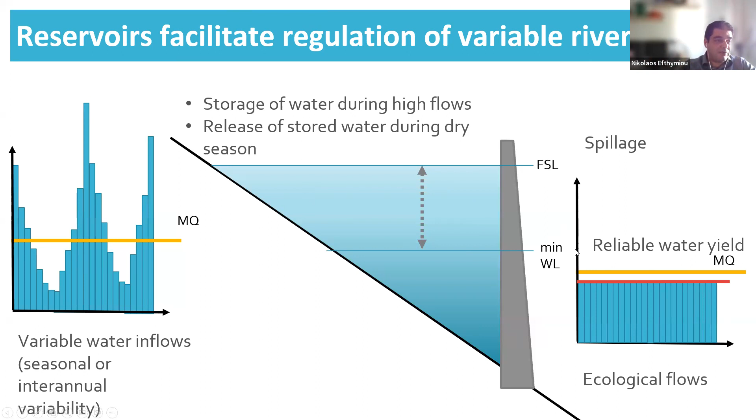So let's see some historic features. We all know that most of the reservoirs worldwide were constructed in the 60s, 70s, and 80s. After this period, we have a significant drop in the number of new reservoirs commissioned. And when we see the cumulative storage that is available globally, we have this S-curve, and we can easily calculate the average age of the global reservoir fleet, which we can assess at around 50 to 55 years old.

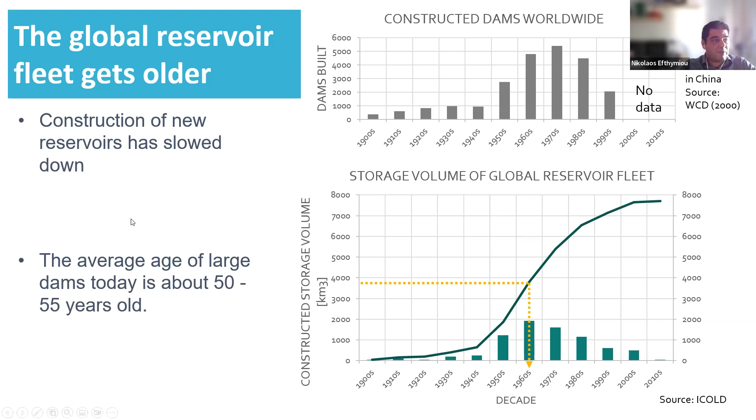You can understand that these reservoirs have accumulated sediment over the previous years of their operation. This sediment has displaced the available storage volume, the water that can be used for beneficial uses, and as a result, it affects the performance of the reservoirs. If we want to see the big picture, there are estimates that global sedimentation ranges between 0.5% and 1% of the available reservoir storage every year.

Here the black line shows the curve that we saw earlier. This is the cumulative storage capacity that has been constructed from the beginning of the previous century up to today. This is just indicative, showing that we have a slower addition of new storage. The gray area shows the constructed capacity, and the yellow area shows the sedimentation based on an assumption of a mean annual storage loss rate of 1%.

That means that between the black line and the yellow area, we have the available remaining capacity as it develops over time. We see that the maximum value was approximately here in the 90s. And since then, you can see that the width of the gray area is reducing. That means that the net storage, meaning the constructed capacity minus the storage loss due to sedimentation, is continuously decreasing.

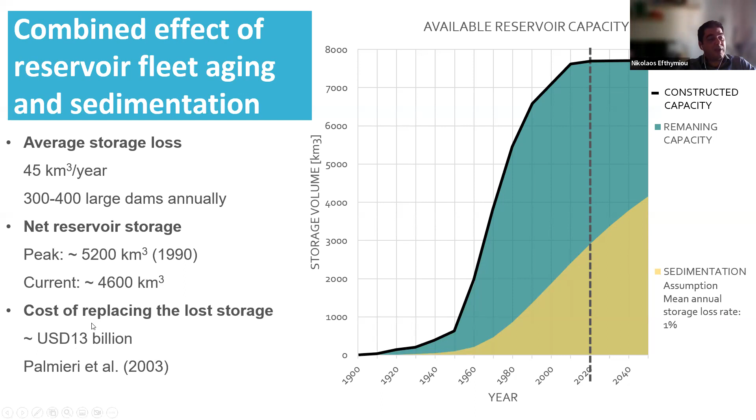Now, if we want to go to the impacts of sedimentation, first of all, we need to understand that there are different aspects and functions related with reservoirs that are affected by sedimentation. First, let's discuss the environmental. And the most important is that we have an interruption of the sediment transport continuity in the river where the dam is constructed and the river connectivity.

So by creating the reservoir, we reduce the flow velocity of the river within the reservoir. As a result, sediment drops out from the water column and remains in the reservoir. Actually, this is the definition of sedimentation. But this means that we create a sediment deficit downstream of the reservoir. Now the river will have an increased transport capacity, but it will be under supply limited conditions. So this is the so-called sediment hungry effect. That means the river is able to transport sediment, but doesn't have the sediment.

And in order to satisfy the sediment transport capacity, we have the phenomenon of downstream erosion. That means the sediment will be scoured and the sediment transport capacity of the river after a few kilometers will be reached. This can cause important environmental consequences which affect the river morphology, the fish habitat, and can reach down to the coastal zone, creating coastal erosion. We have observed cases in Japan as well as in Europe where the coastal zone is eroded with a rate of a few meters every year. You can understand that this causes, of course, huge consequences.

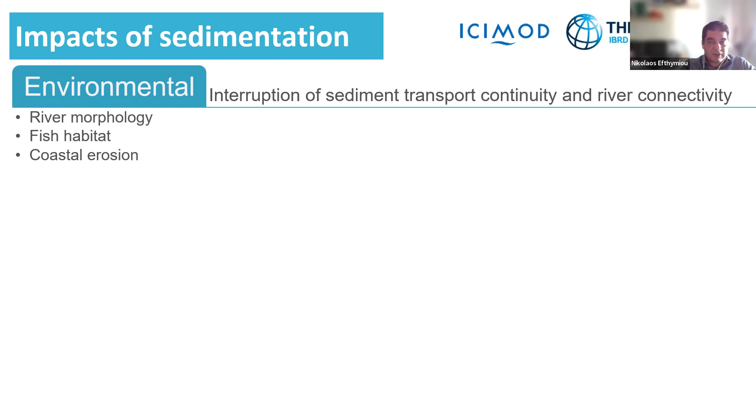Then, of course, we have a very important economic impact driven by sedimentation and the loss of the reservoir's active storage. And this is the reduction of the reliability for water supply and irrigation, as well as for storage hydropower production. We have the reduction of peaking or seasonal or long-term energy storage.

In mountainous areas like Nepal or the Andes in South America, or in Alpine countries where we have large quartz content in the sediment created by the glaciers, we have a significant risk related with the abrasion of generating equipment. As well, if the reservoir serves for flood protection purposes, we have a reduction of the flood surcharge volume, so that means reduction of the effect on flood retention.

And the important aspect that we should also consider is that, of course, the sediment deposits will remain at the upper reaches of the reservoir, causing the so-called deltaic sediment deposits, the sediment delta. And this might affect what will happen with the flood protection upstream of the reservoir. This is also one aspect that must be considered. It is a significant impact of sedimentation.

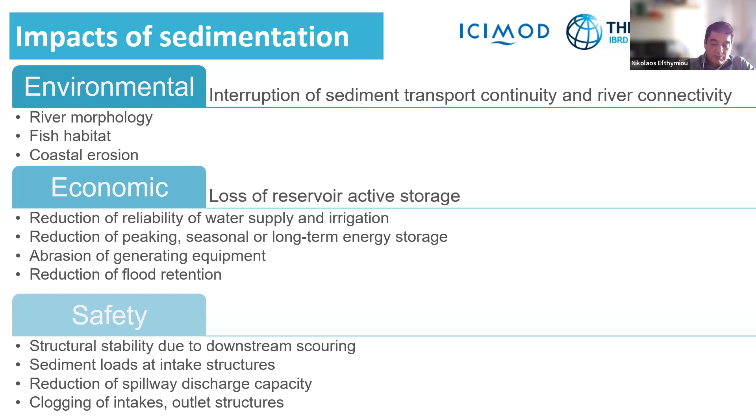Sedimentation might cause a reduction of the spillway discharge capacity, and a very frequent threat and risk is clogging of intakes and outlet structures. For instance, if the bottom outlet embodied in the dam structure is not operated regularly, then usually it is clogged. And this, of course, might affect dam safety, since the bottom outlet is a very important hydraulic structure from this aspect.

Now let's discuss a little bit. We all are experiencing different climate conditions than the ones we have been used to, the ones we were raised with. We see that we have more frequent floods and longer droughts. There is a consensus among climate scientists that climate change causes an increase of the hydrologic variability.

This is clearly expressed, for instance, in the fourth assessment report, in the synthesis report, where it is mentioned that we are to expect increased precipitation intensity, and that means flood events and variability. This phenomenon is projected to increase the risk of flooding and drought in many areas.

So that means we are expecting an increased hydrologic variability, which in the first slide we mentioned is another important parameter that affects the performance of reservoirs. Of course, we're also expecting changes in the availability of runoff. This can be expressed, for example, by the mean annual runoff.

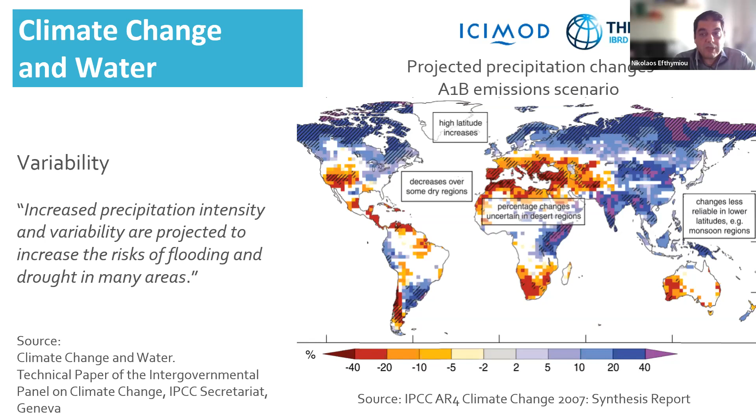And there, of course, one thing that we should acknowledge is that there is important uncertainty in the projections of the global circulation models. So this important uncertainty must be considered in any climate change risk assessment, since we have different opinions on how the mean annual runoff will develop in the future.

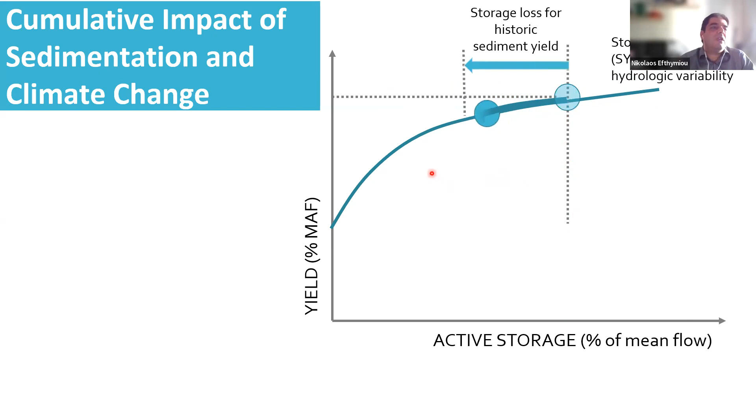And now, because of sedimentation, we know that active storage is reduced continuously. If we move now to a new reservoir condition because of sedimentation, we see that actually we have a reduction of the firm water yield that can be supplied by the reservoir. So this can be considered to be the impact of sedimentation.

On the other hand, we are talking about climate change and increased hydrologic variability. So we know that we can anticipate increased hydrologic variability, more floods and longer droughts in the future. So here the red line represents again the storage yield reliability, but for an increased coefficient of hydrologic variability. At the same time, we can make an assessment that climate change will create an increase of the sediment loads in the river.

For instance, in Himalayan countries, if we have a retreat of the glaciers, this will add additional sediment loads in the rivers. In Mediterranean countries like Greece, we are expecting drier conditions, which will increase the wildfire risk, which is a major parameter driving erosion in the catchment. So we can say that it is very likely that climate change will induce also an increase of the sediment loads.

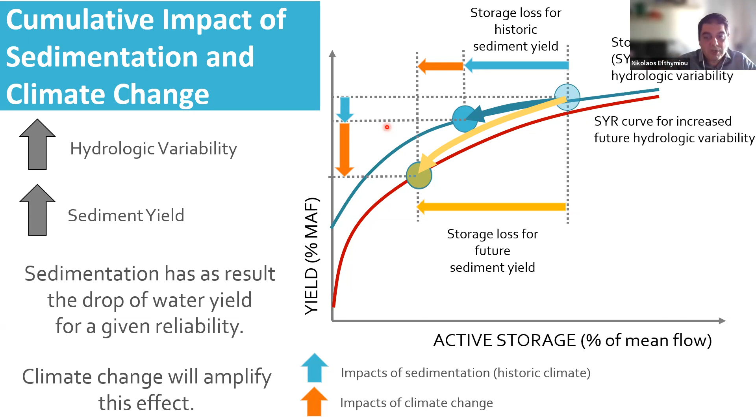Now, if we consider the combined effect of climate change, increased sediment loads, and sedimentation, we see that the impact is much more severe than it would be without the climate change parameter. So this is an important aspect that should be considered, that it's not only sedimentation, but also the future hydrologic conditions most likely will cause more significant impacts of sedimentation, exactly because we will have more intense floods, higher sediment loads, and also the demand will be increased.

So this was nicely formulated in 2003 during the Third World Water Forum in Kyoto, where it was highlighted that in our century we will need to focus on sediment management, and the idea will be to convert the available reservoirs which are non-sustainable. We will need to take action in order to convert them to sustainable facilities. And of course, this applies also to the planned reservoirs, in the greenfield projects.

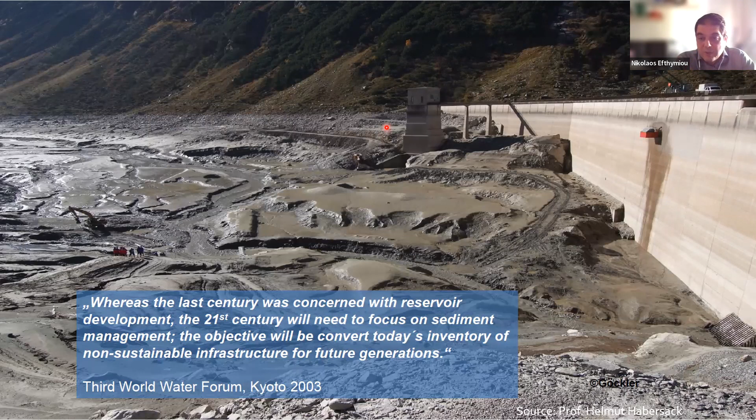We must learn from the mistakes we did in the past, and we must plan reservoirs that will be able to handle, to manage the incoming sediment in order to ensure that they can be managed sustainably. So now just a very brief overview of how this can be done. So we are talking about storage conservation or sediment management.

And here we see the unsustainable paradigm. So that means here we have the incoming sediment. Because of the change of the hydraulic conditions within the reservoir, we have sedimentation, and the sediment releases are much slower than the incoming sediment yield. So that means the storage of the reservoir will be practically eliminated in the future. Of course, it's difficult to predict now what is the lifetime of the reservoir, and this is what we will show how it can be done with RESCON.

But the key idea is that this is something that we should prevent, because we have the environmental impacts downstream. We lose the functionality of flow regulation over time due to sedimentation. And of course, there are the safety aspects that were mentioned. There are different strategies to sustain the reservoir storage. Just to take the main grouping classification that has been reported, methods that have been developed in the past for management of sedimentation include, first of all, a reduction of the sediment yield arriving in the reservoir.

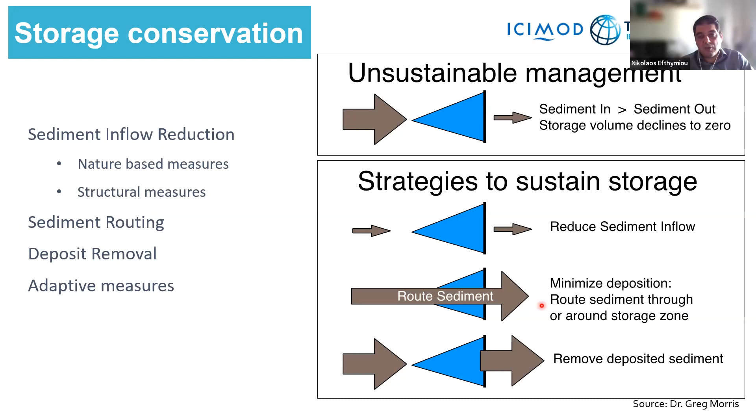And the other general method is to allow sedimentation in the reservoir and then remove the deposits downstream or in upland disposal areas. So there are different methods. This is a classical classification that has been presented by Greg Morris. Here we see the reduction of the sediment yield, which can be, for instance, performed by soil erosion control and revegetation, or by creating additional sediment retention upstream of our reservoir.

So we have also sediment routing techniques, for example, sediment bypass, where we try to divert part of the incoming sediment load around the reservoir, or sediment pass-through, for example, sluicing is a common strategy within this category, where we lower the water level in order to increase the velocities in the reservoir and to facilitate a lower sedimentation and to facilitate sediment passing through the reservoir.

And finally, we have different deposit removal techniques. For example, we have dredging or hydrosuction, or there is hydraulic scouring, for example, empty flushing that can be used for the removal of sediment deposit. An important strategy is the adaptation. So that means we accept that we'll have sedimentation in our reservoir, and we will need to adapt to this situation. For example, here we can have modification of intakes or hydroturbines, for instance, to prevent or to minimize or to mitigate the abrasion risks.

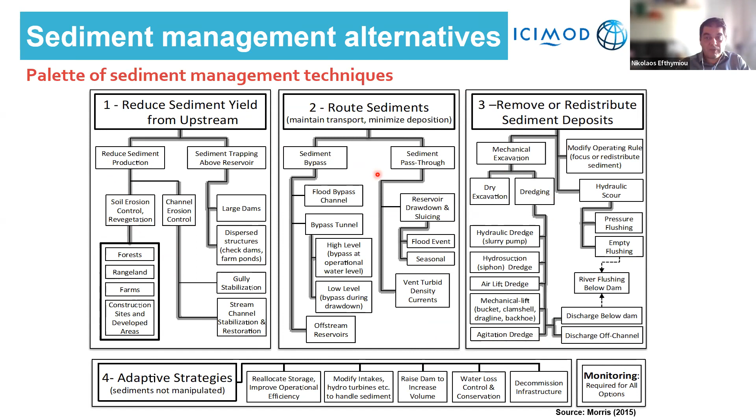An aspect is to raise the dam in order to increase the volume. But we must understand that these are not sustainable solutions. Of course, usually it is a combination of different methods that is applicable in a reservoir, and it's important to highlight that the selection of the optimum sediment management strategy is always highly project and site specific and needs tailoring to the prevailing conditions in each reservoir.

Just a few words on the global sediment management study, although this has been described by Pravin at the beginning of our workshop. So in the previous years, the recently established hydropower development facility of World Bank's ESMAP conducted a global study in sediment management, which was funded by the Austrian government. And the objectives of this study were to improve practitioners' understanding of sedimentation impacts and to support the planning, implementation, and operation of effective and sustainable sediment management both in storage reservoirs and run-of-river hydropower plants.

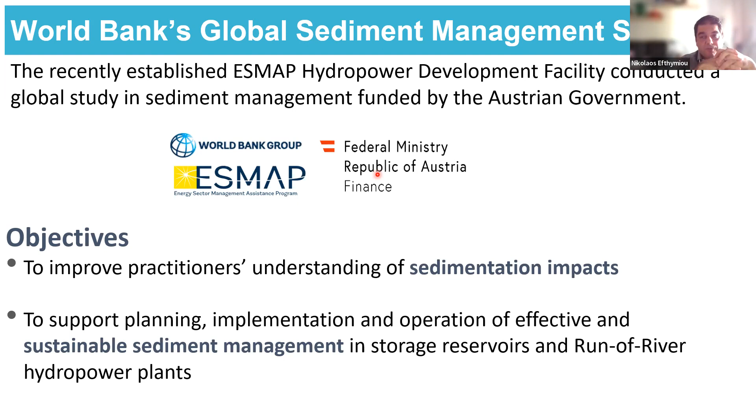So this program had 5 programmatic activities. One of these was the development of technical analysis tools to support the identification of sedimentation risks and screening of sediment management alternatives. And one knowledge product of this program was the development of the new version of the model RESCON 2, which actually is the topic of our webinar these days.

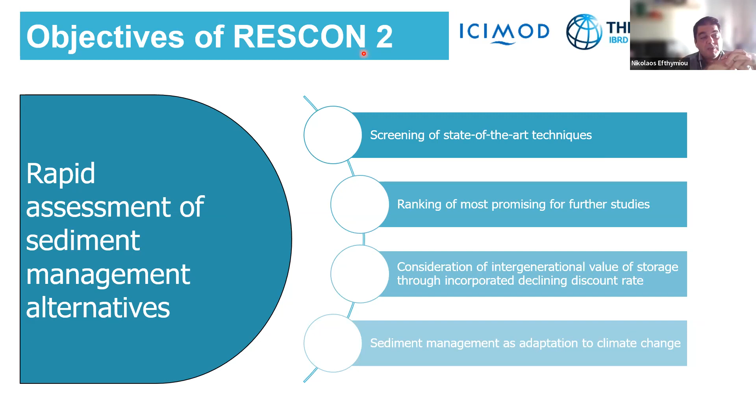So without any delay, I would like to go into the objectives of the RESCON 2 analysis, which are to provide a screening of the state-of-the-art sediment management alternatives. So there is a wide palette of sediment management techniques. To rank the most promising for further detailed studies. And a very important aspect is to consider the value of intergenerational equity that is created by storage conservation. And finally, to provide a preliminary assessment of climate change related risks in combination with sedimentation, and an assessment of sediment management alternatives as an adaptation to climate change.

So this work is based, of course, on previous works. So we have the manual of the first version of RESCON. So it is a publication, Extending the Life of Reservoirs, from World Bank Group, where George Annandale, Gregory Morris and Pravin Karki provided guidelines on sustainable sediment management, both for dams and run-of-river hydropower schemes.

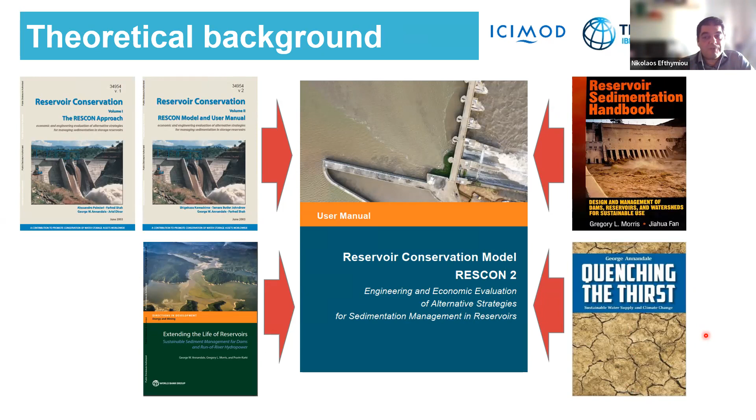We have the classical textbook on reservoir sedimentation by Gregory Morris and Jiahua Fan, and the book from George Annandale, Quenching the Thirst, where he presents the impacts of sedimentation on reliable freshwater supply, and he presents the importance of reservoir sustainability. So we are talking about resources.

An important aspect is that, as with every software and model, there are limitations that must be well known from the beginning. RESCON 2 is a computer program which is designed to be used in pre-feasibility studies when we have limited and readily available site-specific data. So that means that it is not a substitute for more detailed studies, which must be conducted with numerical and physical models during subsequent project development stages, during feasibility studies or detailed design.

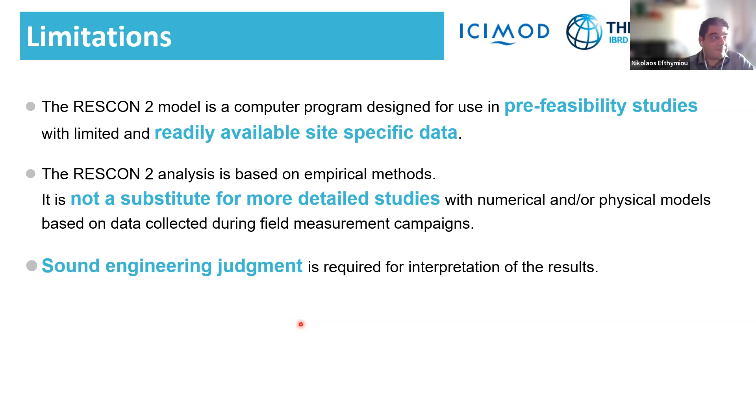So we mentioned briefly that there was a previous version of RESCON. Actually, the development of this model goes back to 2003, when the first version was published by the World Bank with contributions from Alessandro Palmieri, George Annandale, Farhed Shah, and other workers in the area of reservoir sedimentation. This was an Excel-based technical analysis tool, and was able to assess deposit removal techniques in a relatively simplistic manner.

In the meanwhile, until 2015, RESCON was extensively applied worldwide, and the need for storage preservation emerged more on the surface. As the global reservoir fleet got older, the importance of reservoir sedimentation management became even greater, and climate change emerged as a controlling parameter in the future.

So this prompted a revision and upgrade of RESCON, and in 2017 the beta version of RESCON 2 was published, with the main innovation that sediment routing techniques were also included in the assessment. So apart from dredging, flushing and hydrosuction or trucking, sluicing, bypass and density current venting could be assessed. Again, this was an Excel-based platform. We had a graphical user interface, but actually the computations were performed through a very long macro developed in Excel. This version was developed by the World Bank, which contracted Fichtner Consulting Engineers from Germany.

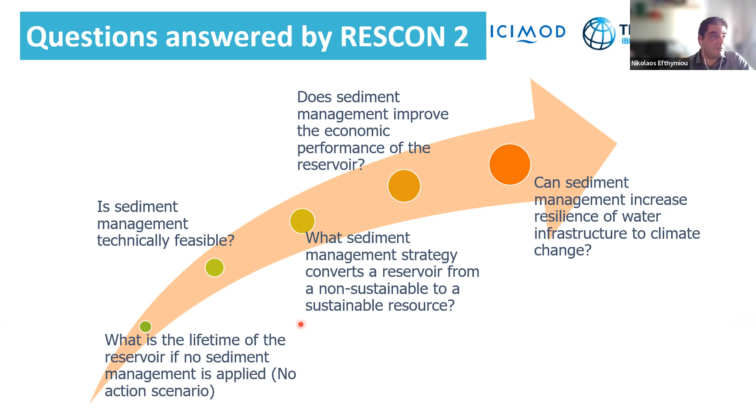So the capabilities of RESCON is that it is able to predict the time path, the development over time of sedimentation, as well as the spatial pattern. It performs a preliminary assessment of the development of the spatial pattern of reservoir sedimentation. That means how the deposits are allocated between active and inactive storage.

We know that inactive storage or dead storage is the storage that is below the minimum operating water level or the sill level of the lowest outlet of the reservoir. And active storage is the storage that can be used for regulation of incoming flows and that affects the firm water yield that can be supplied downstream.

Apart from this, we evaluate the state-of-the-art sediment management alternatives. We talked earlier about catchment management to reduce sediment yield arriving at the reservoir, sediment routing, deposit removal, as well as combined strategies, which involve different techniques applied simultaneously, concurrently, or sequentially.

It includes an economic appraisal whereby the firm water yield is assessed and valued, and it considers the virtues of intergenerational equity and sustainable development through discounting concepts that are used for the assessment of the net present value of the future benefits, which also give a value on the future benefits today. We will discuss this in the coming days.

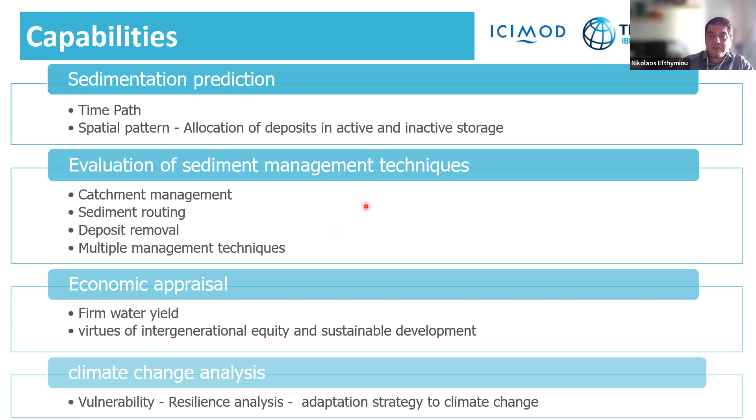And finally, as we mentioned, we have a climate change analysis where the vulnerability of the reservoir is assessed based on a climate stress test. We perform a resilience analysis where we evaluate the performance of the reservoir for different configurations, whereby configurations are defined by different sediment management alternatives and for different climate futures. And we have also an assessment of the adaptation to climate change: which sediment management alternative provides a robust adaptation to climate change.

After the first assessment, let's call it the physical performance of the reservoir, and based on the prevailing condition after sedimentation, we can calculate the water yield that can be supplied for a given reliability from the reservoir. This also depends on the prevailing hydrologic variability, the coefficient of hydrologic variability.

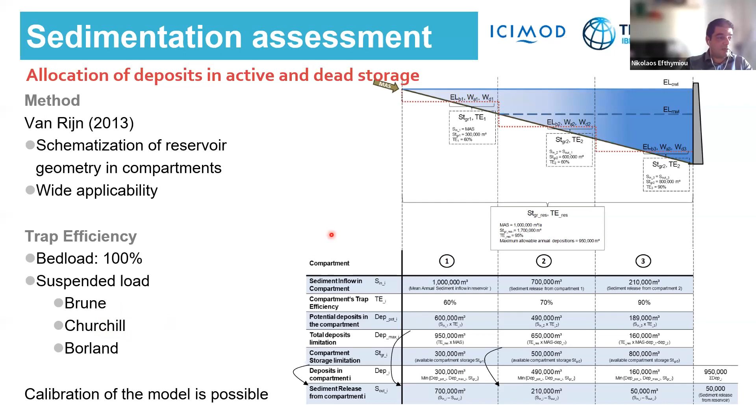It's important to point out that it is not possible to assess adaptive strategies except for decommissioning of infrastructure. We will see during the examples how this can be assessed. And of course, it's important to evaluate different combined strategies involving multiple techniques.

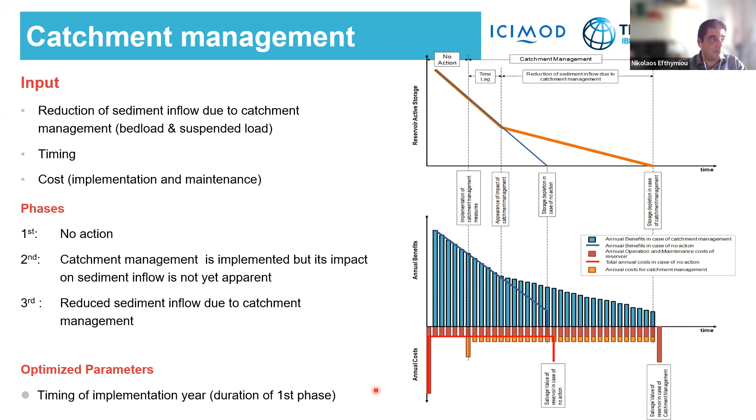Now we discussed the economic appraisal. So we said that we depend on the active storage availability. We explained how this is calculated with the trap efficiency and the assessment of the annual sedimentation. The water yield, which is now partitioned into different water uses. So it is possible to specify if we have a multi-purpose facility.

Hi, Dr. Nikos. Sorry for the interruption. Maybe after some section, you may consider having a short break, depending on participants' interest. You can decide accordingly after appropriate timing. Maybe a 5 minute break or so. Yeah. Give me a few minutes to complete the economic appraisal, and then yeah. Sure, that should be perfectly fine. Thank you. Excellent. Thank you so much.

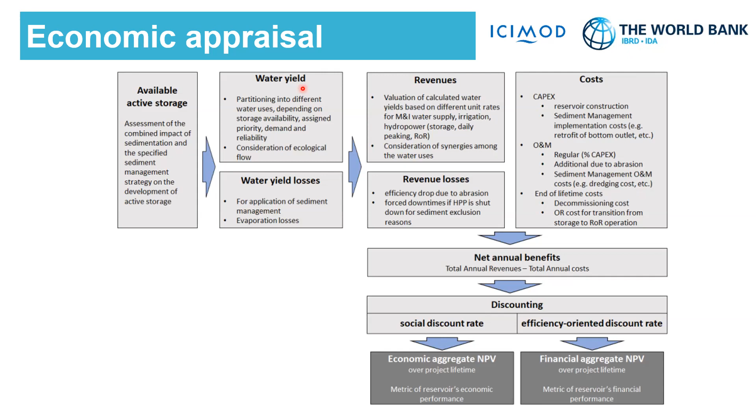So based on the available active storage, we calculate the water yield, where we can consider also the different water uses if we have a multi-purpose facility, as well as the ecological flow demands to be released downstream of the dam. We assess the water yield losses related with sediment management, as well as evaporation.

It's important to point out that sediment management is also associated with activities like reservoir emptying for flushing or water level drawdown for sluicing. As a result, this also has an impact on the water availability that affects the firm water yield that can be supplied downstream of the reservoir. So based on the calculated water yield, firm water yield and the respective water yield losses, we calculate the revenues and the revenue losses, the foregone revenues because of sediment management.

So here we have the related costs, where we have the reservoir construction, the capital expenditures, as well as capital expenditures for sediment management. For example, if we want to retrofit an existing reservoir and dam with a new outlet for sediment management, for example a new bottom outlet in order to perform flushing, usually this is very expensive. So this is an additional cost that should be considered in any sedimentation and sediment management analysis. We have the annual operation and maintenance costs, which are usually expressed as a % of the capital expenditures for the construction of the reservoir.

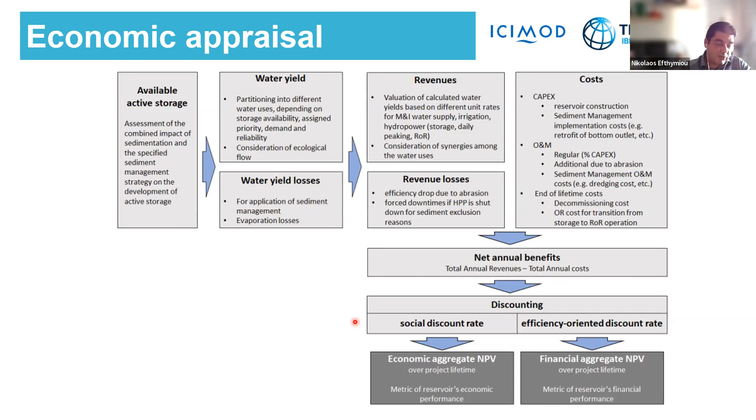So we have implemented discounting concepts that enable assessment of the value of intergenerational equity that is created through sediment management and the extension of reservoir lifetime.

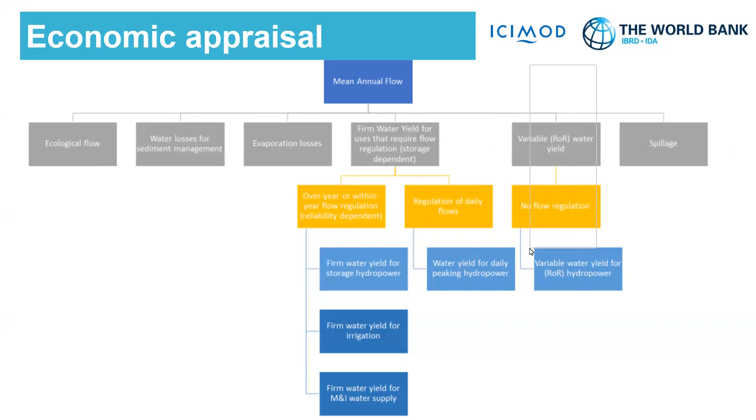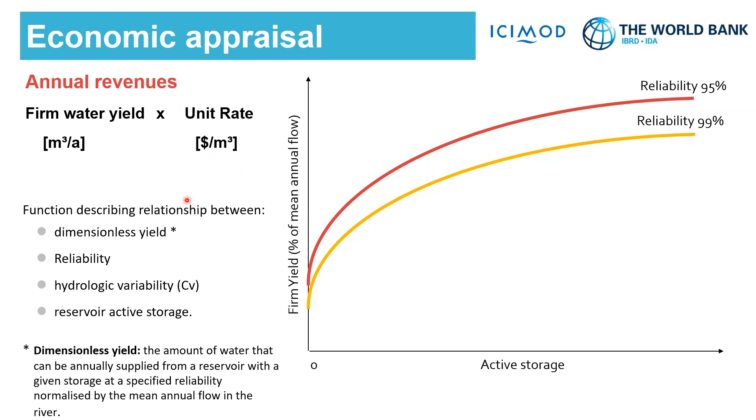So again, we show the curves that are used for the assessment. Here, this is just indicative. And of course, when we have the requirement for higher reliability of the water yield provided for beneficial services, then the curve goes lower than the respective functional relationship when we have lower reliability demand. And after calculating the firm water yield with empirical approaches, we multiply with a user-specified unit rate expressed in dollars per cubic meter. And this way we calculate the annual revenues.

Now then we discussed also the costs, where we have capital expenditures for construction of the reservoir and implementation of sediment management strategies. We have the regular annual operation and maintenance costs for sediment management. These annual operation and maintenance costs are also affected by the abrasion risk, which again depends on the condition of the reservoir, if it can act as a desander or not. And we have also the decommissioning costs or costs for transition from one hydropower operational mode, for example, storage facility, to run-of-river operation.

Then, depending on the discounting scheme, we have different development of the net present value. Here we see an example where we are applying flushing, and for this reason you see this wide band of annual net present benefits. So the lower side shows the years where we have implementation of flushing. So that means we have additional water releases for flushing. This water cannot be used for beneficial services. So that means we have lower revenues.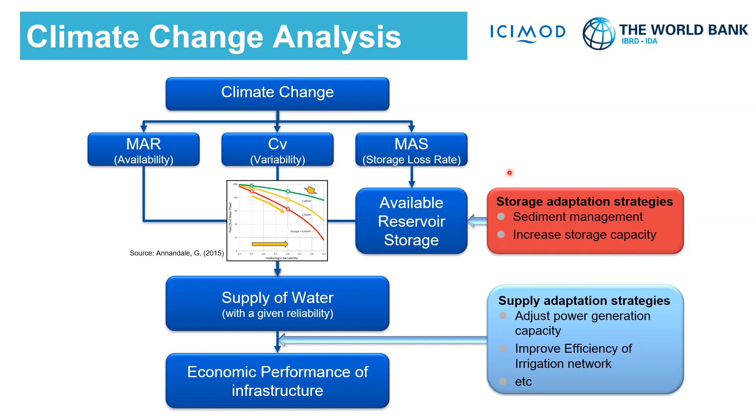Now, the climate change analysis incorporated into RESCON is based on projections of precipitation and temperature. There are different sources to obtain this information freely available on the internet. We are using the World Bank's Climate Change Knowledge Portal, where it is possible to obtain the projections of the different global circulation models, the GCMs, for different emission scenarios and the projected anomalies, so the projected changes in the mean annual value for precipitation and temperature.

During the examples that we will run, we will go into detail and we will see how we can obtain this information from the World Bank Climate Change Knowledge Portal. Here, this is just an example. Again, we will speak more in detail about this. But this graph here shows us the impact on the long-term economic performance of different changes of the mean annual runoff and the mean annual sediment yield for a specific reservoir. The black points indicate the projections of the different models.

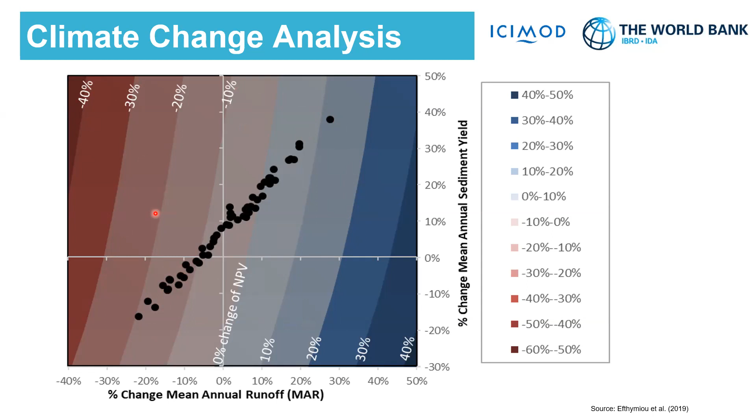So just to provide a summary of what was presented earlier. RESCON 2 provides an assessment of the reservoir sedimentation process with focus on the time path, the development over time, and the spatial pattern of sedimentation in order to assess the allocation of deposits in active and dead storage, and considers a partitioning between bed load and suspended load. It provides an evaluation of the performance of state-of-the-art sediment management alternatives, including sediment yield reduction through catchment management measures, sediment routing, or deposit removal techniques, as well as combined strategies.

It incorporates in the economic appraisal declining discount rate concepts, which facilitate an assessment of the value of intergenerational equity created through storage conservation, and provides an assessment of sediment management as an adaptation strategy to climate change. An aspect that was not mentioned earlier is that this assessment for climate change considers the uncertainty related with the different climate change projections, and facilitates an evaluation of the sediment management alternative project configuration which provides robust adaptation to climate change.

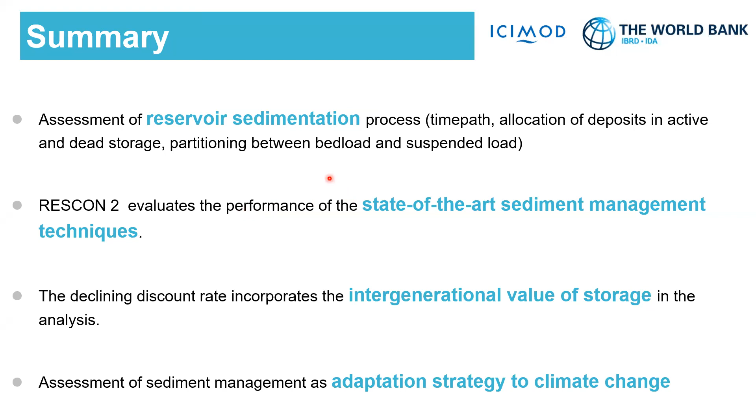So first, thank you very much for bearing with me. It was a lot of talking from my side, and a little bit theoretical. So in the next 30 or 35 minutes, I will try to show a practical application of RESCON in an example. And I hope that we'll also have time for questions and for a discussion after this.

I just want to give a brief presentation of how RESCON can be applied, and in the next 2 days we'll have a lot of time to go through this together and to see many different aspects. So in the next few minutes I will not cover all aspects, just the basics, and the idea is that in the next 6 hours, tomorrow and the day after tomorrow, we'll go through this together with practical examples.

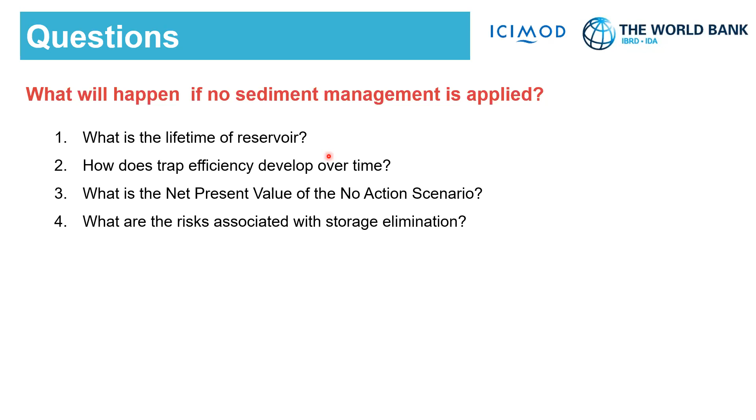So the first question that we will try to answer is what will happen if no sediment management is applied. That means what is the lifetime of the reservoir? How will the trap efficiency develop over time? This is an important aspect if we want to retain sediment in our reservoir in order to prevent them from passing through our turbines, for example. What is the net present value, the long-term economic performance of our reservoir for the no action scenario? And what are the risks associated with storage elimination?

We'll answer similar questions for the sediment management techniques. Again, how can the reservoir lifetime be extended through implementation of sediment management? How is the reservoir trap efficiency affected? And is there a possibility to improve and optimize the economic performance of the reservoir? And finally, we will also see what is the impact of climate change on the performance of the reservoir.

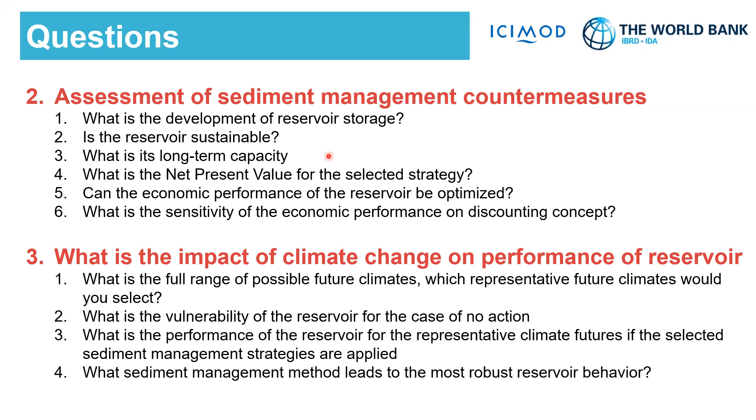So just a brief overview of the example that we will run. This is an existing reservoir. We will run this as a greenfield reservoir in order to see how sediment management could be evaluated at the very beginning of the project development for this reservoir. The studied reservoir had an initial capacity of approximately 150 million cubic meters, which was partitioned into 46 million cubic meters for active storage and 102 million cubic meters for inactive storage.

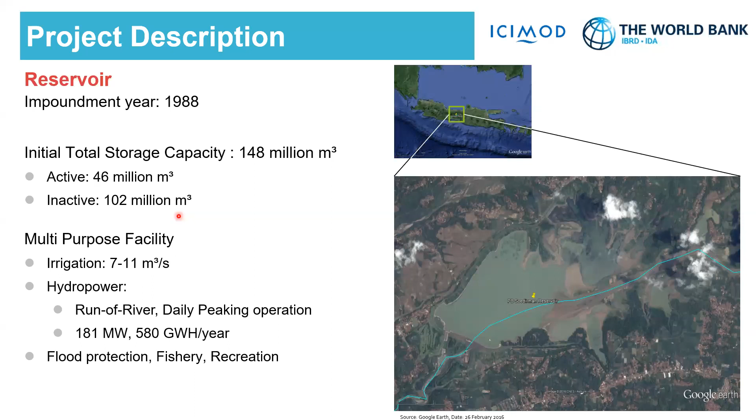It is a multi-purpose facility which serves for irrigation as well as for daily peaking hydropower operation with an installed capacity of 180 megawatts and mean annual energy generation of 580 gigawatt hours per year. In addition, the reservoir is used for flood protection, for fishery, and for recreation.

So we have a rockfill dam with a fixed overflow gated spillway. The power station is at the toe of the dam, so we don't have a diversion scheme. And the intake is an intake tower, whereby the bottom outlet is positioned very close to the intake tower and is discharged downstream next to the power station.

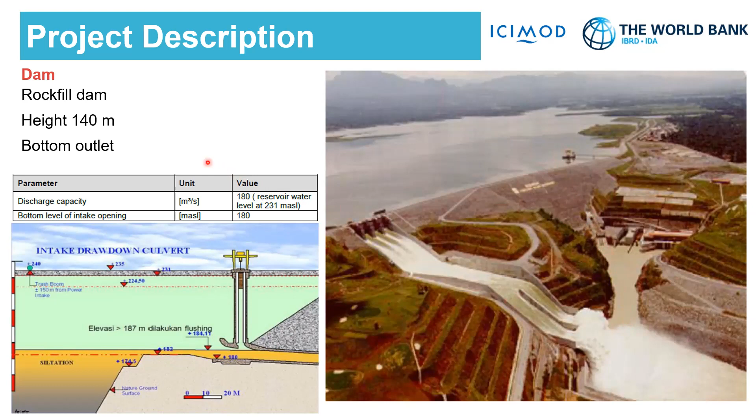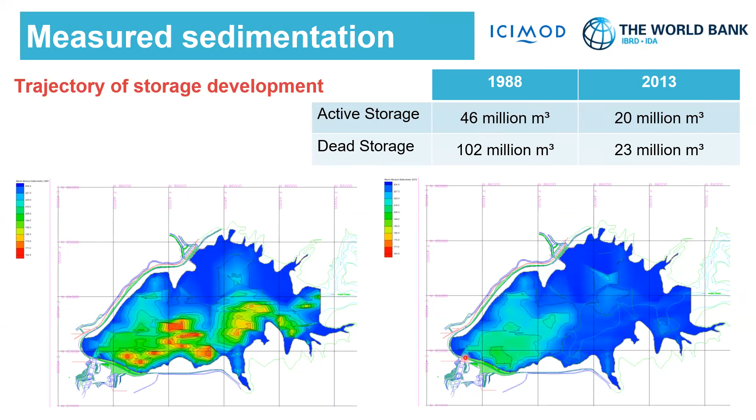The incoming sediment comprised mostly sand and silt, and we had the formation of a sediment delta. For this reason, you see that the sedimentation occurs mainly in the upstream reaches of the reservoir, where the flow comes from the right to the left, as well as deposits close to the intake. The intake is located here, and here is our spillway.

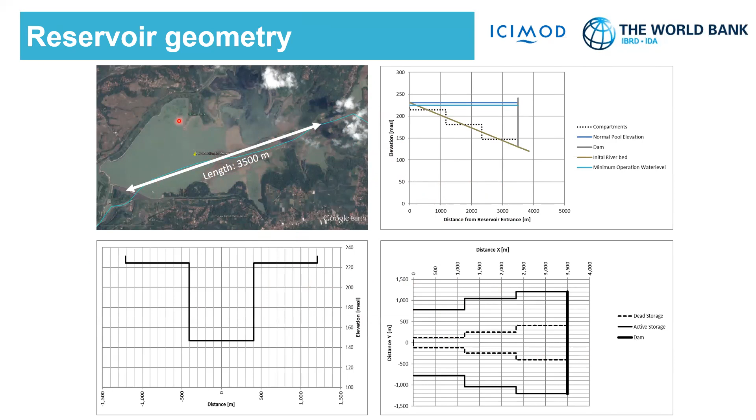So here is a summary of the geometrical features. We won't go into detail now; we will see this in RESCON 2. Just an important parameter is that we have a length of approximately 3.5 kilometers of the reservoir. And in this picture, you can see the formation of the delta. All this is sedimented, and you understand that the active storage in this area is practically lost.

Here is a description of the incoming annual flows. We have a mean annual runoff of 2,950 million cubic meters per year, corresponding to a mean annual flow of 75 cubic meters per second. And we have a standard deviation of 450 million cubic meters. This is an important parameter in order to assess the annual coefficient of hydrologic variability, which is approximately 0.2. So generally, this is considered to be a reservoir characterized by low hydrologic variability.

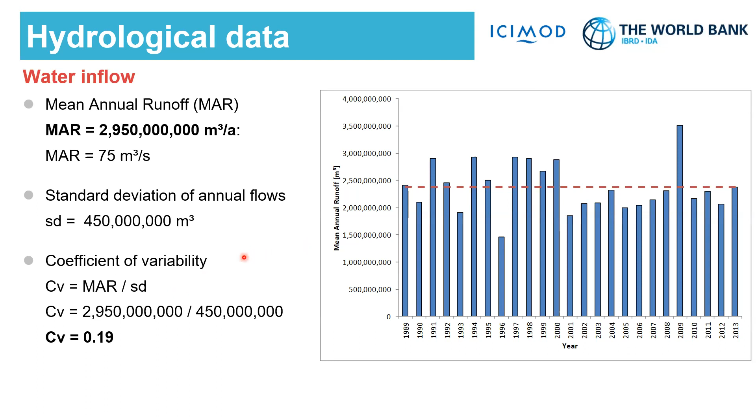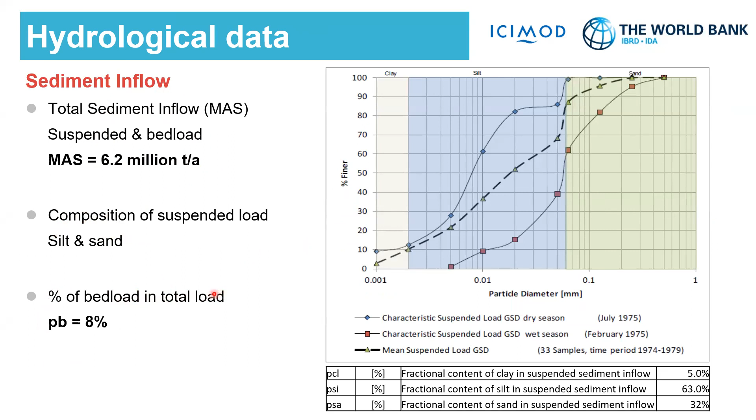The mean annual sediment yield is approximately 6.2 million tons per year and comprises primarily silt and sands. The bed load has been calculated as 8% of the total load. And generally we have a wet season which lasts from November till April, and the dry season has a duration of 7 months.

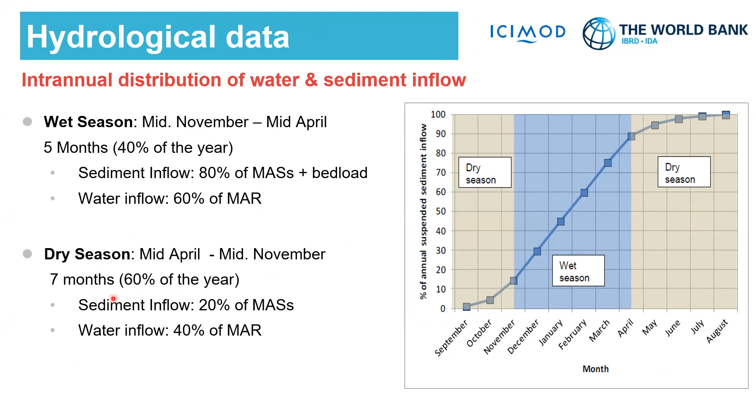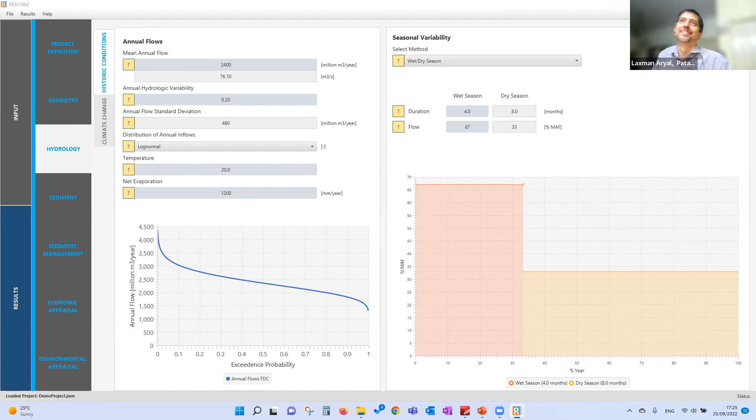I think this is just information. There's no question. Maybe the model is very simple, as Nikos is going to explain. I think we can run it by ourselves. First, he can show a typical example or explanation, which is much better. Then all the participants can try by themselves, and tomorrow or the day after tomorrow, we can have a discussion. That is my idea. Thanks. And also Sanita was asking whether there is an opportunity to ask questions. Sanita, if you have any, please go ahead.

Yes, thank you, Vishnuji. Hi, everyone. I'm Sanita, a PhD student at Utrecht University. I was just wondering regarding this compartmentalization of the reservoirs. You showed that one can choose the number of compartments. Can you also vary the width of the compartment based on how your reservoir bed might change depending on the steepness of the bed over space?

Sanita, this is a good point. No, it's not possible. The width of the compartments is automatically calculated. If you try to combine these two plots, the longitudinal profile and the plan view, imagine that we have a combined pyramid. This pyramid will have the volume specified by the user, a height equal to the length of the reservoir, and the width is calculated automatically in order to fit this pyramid shape to the available storage.

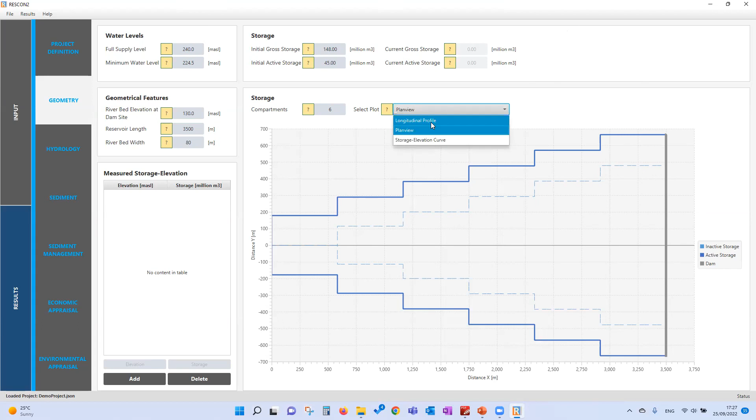As a follow-up, you mentioned that you can put in your own storage elevation curve and your own flow duration curve. But if there isn't enough flexibility to change parameters in the model, how do you use that information? For example, being able to change the width of the compartments could be one way to calibrate this model to fit the storage elevation curve you have in the field. So how do you see this feature being used, where I compare my actual storage elevation with what this model is coming up with?

Sanita, we must consider that, first of all, this is for preliminary information. So for early project development phases, everything is based on empirical equations.

So this is why I emphasized that this analysis should not be confused with the necessary numerical modeling, where of course we will have cross sections and detailed information on incoming daily flows and so on. And at the moment, as said, it's not possible to change this automatic schematization.

The idea to add here, for example, a storage elevation curve is for purposes of comparison. This is to provide an indication if the automatic schematization is okay. But as said, at the moment, the only thing that can be changed is the number of compartments.

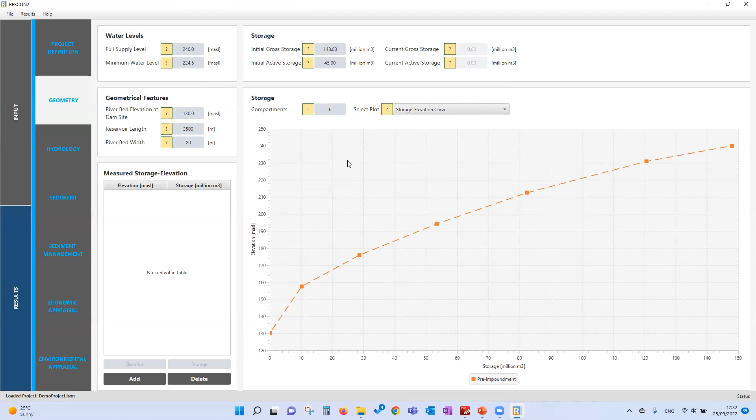Previously this was not considered, but now in this version we have the possibility to assess multi-purpose reservoirs. Just a sneak preview here: we must specify the different water uses, the reliability, the respective demand. We have the different unit rates. This is done here in economic appraisal and revenues. And we must also specify the priority of the water uses. Okay.

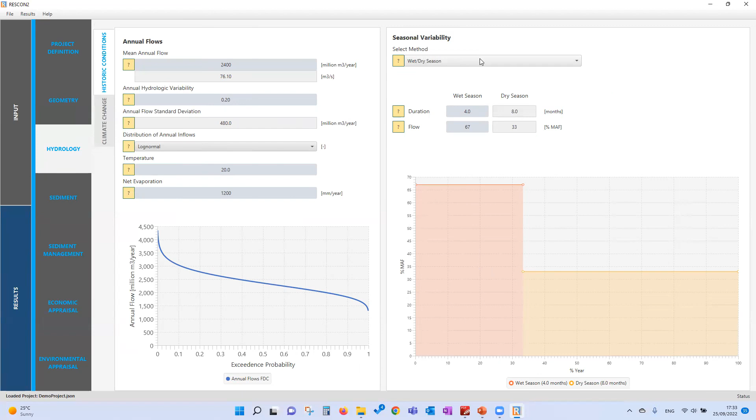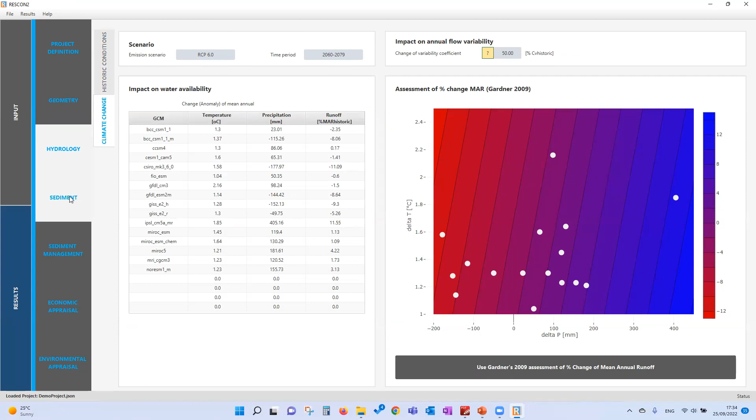So here we had the specification of the seasonal variability. We said we have two possibilities: one with a very rough description, wet and dry season, and the other with mean monthly flows. And here we have the climate change input. Let's see this later, not now. Let's see now the historic climate conditions.

Then we need to specify the sediment inflows arriving at our reservoir. Here we had 6.2 million tons per year. Bed load was 8%. Again, an important parameter is the in situ density of sediment deposits in our reservoir. This depends also on the gradation. Here, 1.35 would be considered a typical value. If our material is more sandy, we can expect higher in situ bulk densities of sediment deposits. If our material is finer, we can expect lower values.

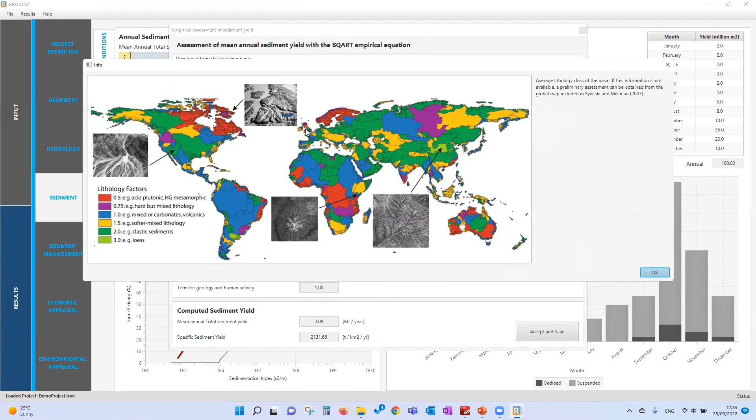An important aspect is that, because we are always talking about early project development phases, if the information on the mean annual sediment yield arriving in our reservoir is not available at that time, we have implemented an empirical equation, the BQART empirical equation, which is based on information that can be easily retrieved either from Google Earth, or there are global maps. This global map here indicates the geological classification of different basins around the world, which can be used for a rough first assessment of the mean annual sediment yield arriving in our reservoir.

The next step is to again specify the seasonal variability of sediment yield. Again, two possibilities: either through mean monthly sediment yields, which can be derived from a sediment rating curve. If this is not available, then we can again just specify roughly that 75% of our mean annual yield arrives during the wet season, which earlier was calculated during the specification of the hydrological input.

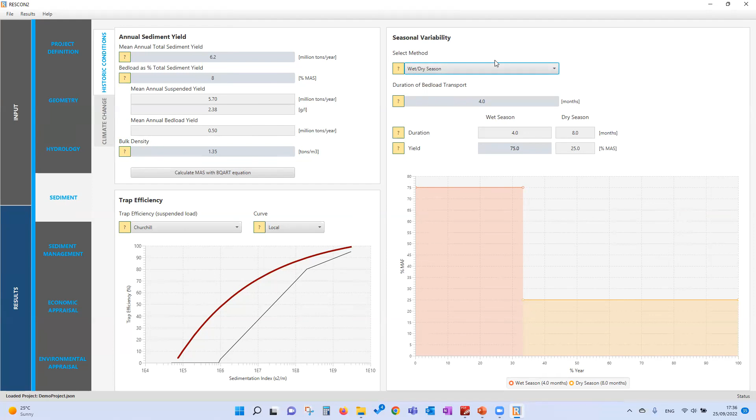Depending on the character of the river, if we have a sand bed river or a gravel bed river, the duration of bed load transport can change also. For example, in sand bed rivers, we have longer durations of bed load transport because the material is sand and can be more easily entrained than in gravel bed rivers, where we also have this coarse armor layer protecting the riverbed. With bed load, we mean the coarse material, gravel and boulders and coarse sand, which is transported in the vicinity of our riverbed. In gravel bed rivers, usually this duration of bed load transport is shorter, within a few weeks, where the armor layer is breaking and we have the transport of coarse material.

An important parameter is that here we must specify the empirical approach that will be used for the assessment of the trap efficiency, which is the main parameter for the storage development calculation. We have two possibilities, the classical approaches of Brune and of Churchill. Churchill, for example, presented two curves, and we use the same annotation. The one curve he named local, which means that the sediment originates from an unregulated catchment. If we use the upstream curve, this means that we have reservoirs upstream, which trap one part, and the sediment releases consist mostly of fine sediment.

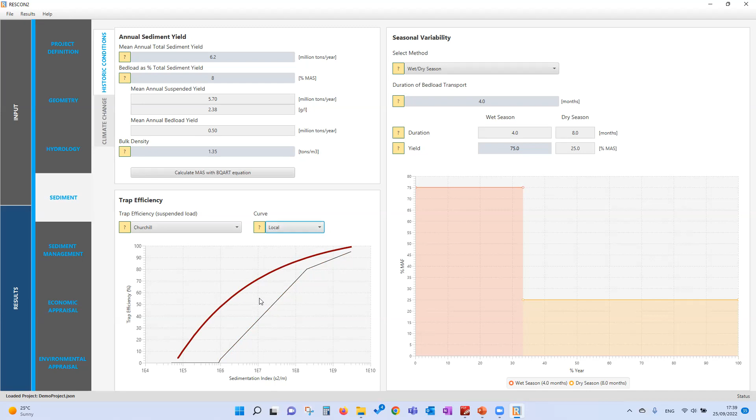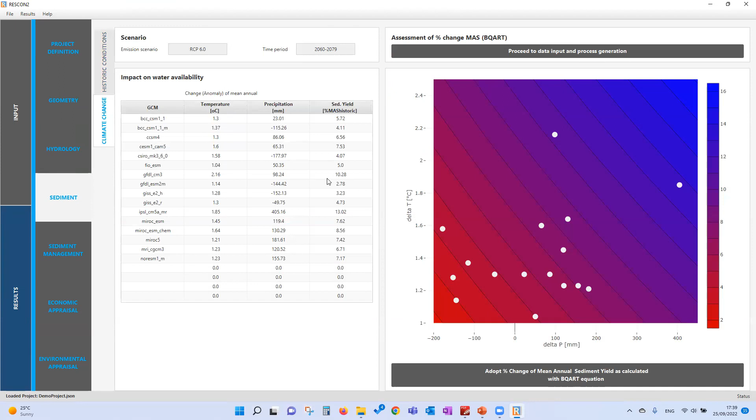Again, here we can specify the impact of climate change on sediment yield. We will see this later. Then the next step, sorry.

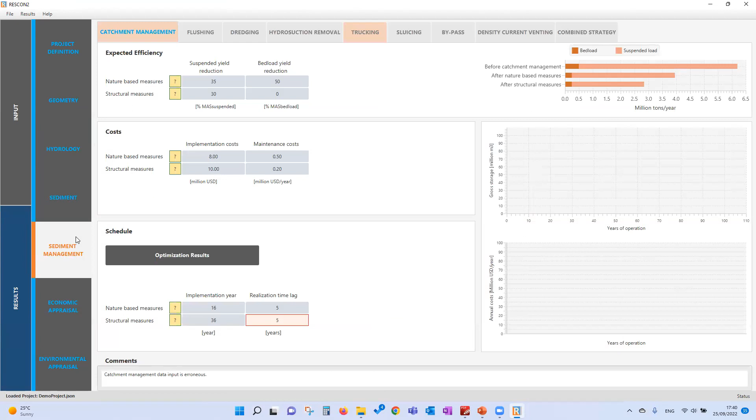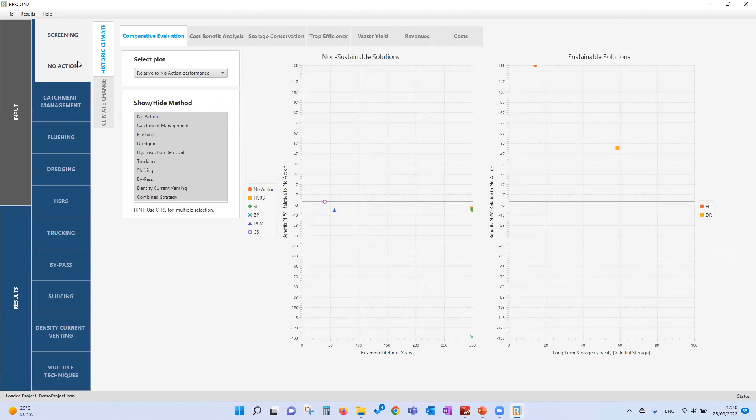So now, based on this information, we can see the first results. We have specified our reservoir geometry, the mean annual runoff that arrives in the reservoir, the sediment yield that arrives in our reservoir, and the trap efficiency method that will be used for the assessment. In order to go to results, of course, we pressed this button, results. And here we can see the first assessment for the no action scenario, for the historic climate. We didn't discuss climate change.

We have here a dashboard logic. You can consider that the first line provides a description of the physical performance of our reservoir. This graph is for the no action, and then we have different graphs for other sediment management alternatives. Here we have the development of storage over different years of operation, and then we have the trap efficiency and the sediment balance. So the first information that we get is that the lifetime will be 40 years. That means that our storage will be eliminated after 40 years.

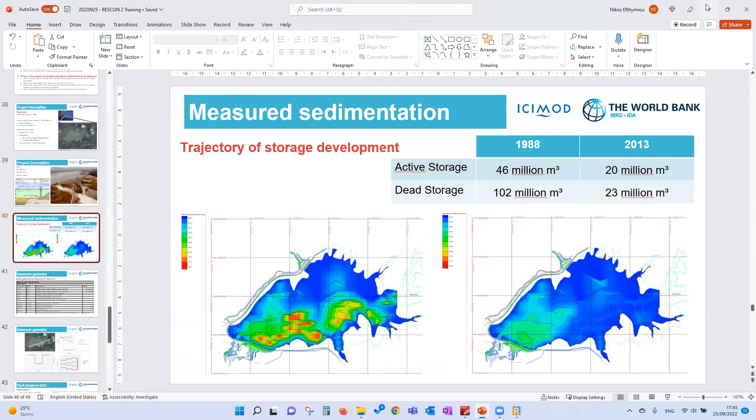And one important point that I would like to make here is that in the past, when we were designing reservoirs, we were considering that first our dead storage will be sedimented, and then we will start observing impacts on our active storage, which is actually responsible for the economic performance of our reservoirs. But now that we have seen this simplification of the reservoir, this triangular or pyramid-shaped reservoir, the concept of first losing the dead storage without any impact on the active storage implies that our sediment deposits appear from the bottom of our reservoir and magically go up.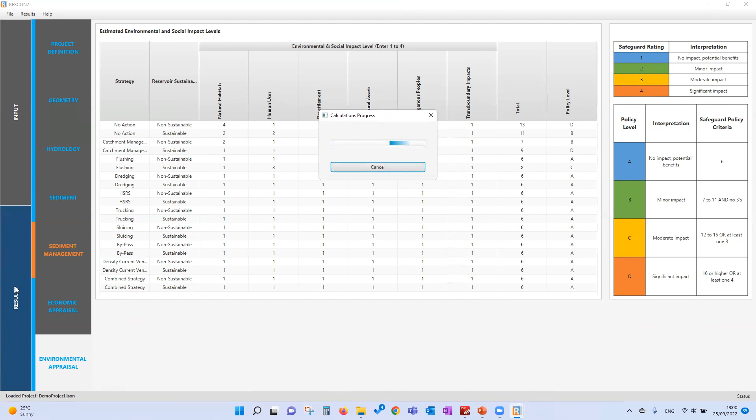Now, if we go to results, and we go to no action, we see that here the D policy level that was evaluated based on the specified ratings for the different impacts is plotted here. We see also that we have a non-sustainable reservoir, and here is an explanation why the reservoir is non-sustainable.

So the same can be done also for different sediment management alternatives. I know I spoke a lot on this question, but this is a very good point. And all this I would say anyway later, so actually we're just rearranging the presentation.

All right. There are a couple more questions, but maybe you can continue with this one. And if we can handle them at the end of the session, we can. In the worst case, we will communicate these questions to you. You can just prepare a response and maybe circulate it tomorrow. Depending upon your planned contents, we will see at the end. Will that be okay? Yeah, of course. Sure, thank you. Please continue. Okay.

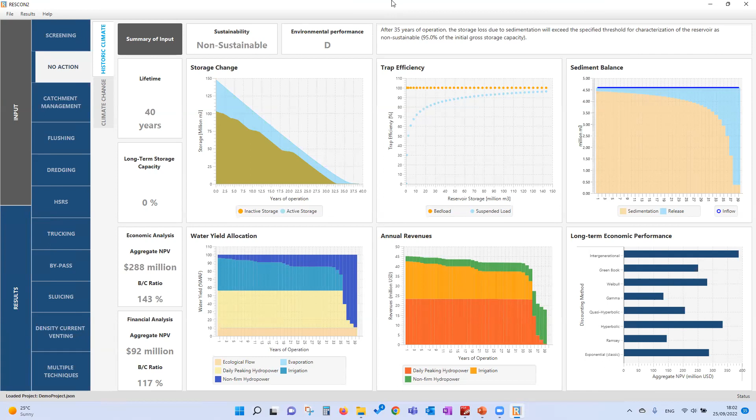Then we specified geometry, hydrology, sediment. Before we go to the specification of sediment management alternatives, we must specify parameters for the economic appraisal. We saw earlier the results for the physical performance. Here we need to specify parameters related to costs and parameters related to revenues. We said that we had construction costs.

Here we provide some guidance if we don't know what it will be, because we are always talking about early project development phases. We don't have a cost assessment at this phase. Usually we do this based on a rough estimate of specific cost. If we have a hydropower facility, then we can use a specific cost expressed in million US dollars per megawatt. And if we don't have hydropower and it is a reservoir used for irrigation and water supply, then we must use the unit rate US dollars per cubic meter.

In this case, we're evaluating a hydropower scheme. And if we don't know what would be a plausible range of specific costs, here we're providing some guidance and reference either to the manual or other publications that could support a preliminary estimate of the costs. The same applies also for the operation and maintenance costs. They are expressed as % of CapEx.

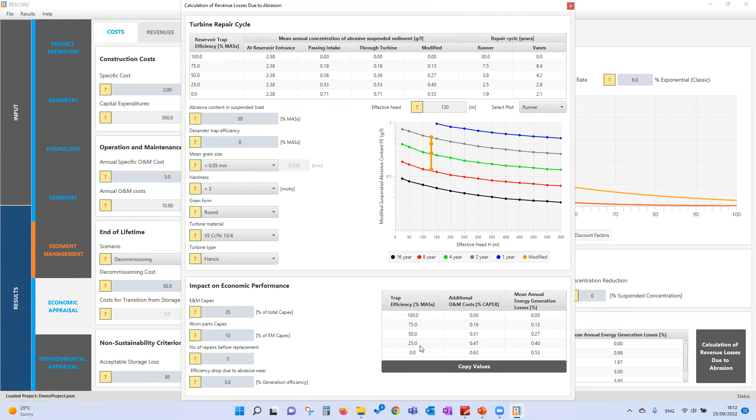Now, if trap efficiency drops to 75% because of sedimentation, then 25% of the incoming sediment will go through our turbines. In that case, we can expect an increase of 0.16% of the capex because of costs for repair of worn equipment, and a small drop of the mean annual energy generation of 0.13%. And we do the same assessment for different conditions of our reservoir. If we copy these values, they are transported here in this table and incorporated in the economic appraisal.

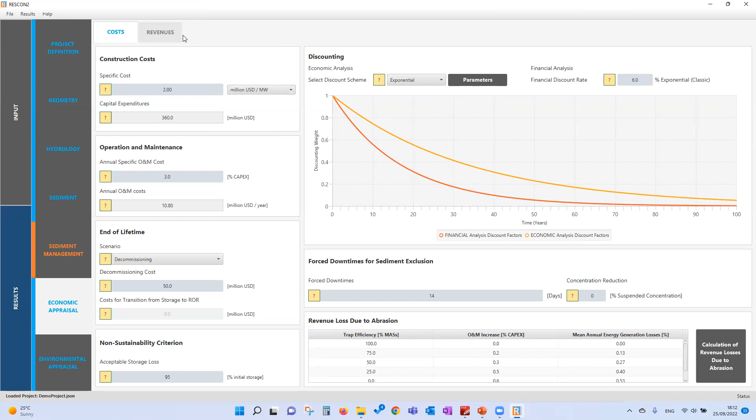So with time, I think that we should continue tomorrow with this. What do you think? With the data specification, there is this that I would like to describe tomorrow, 5 or 10 minutes. And then the sediment management alternatives we will go through together during our exercise. Is this okay with you, or would you like me to finalize the input for the economic appraisal now? No, I think it's almost 9. All the participants and also you should be tired by this time because it's a thorough 3-hour session. So if it is okay, we can take a couple of questions in the chat box, and then maybe continue tomorrow.

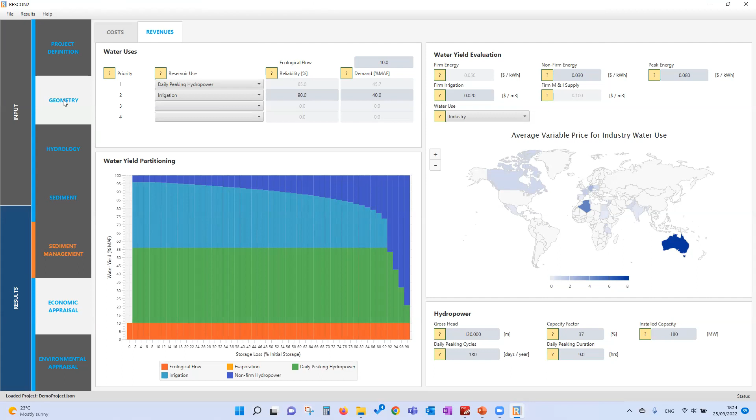One that's interesting to me is: is there any limitation on the size of the reservoir to get better results from the model? Any suggestion on that? Good question. Yes, there are limitations. First of all, we must consider that there is an underlying algorithm here. If we have a very small reservoir, then generally this can bring the computational algorithm to its limits. So this is one limitation, I would say. I would not apply this for very small reservoirs.

Or it depends on what everybody defines as a reservoir. It might be a very small head pond, say with few thousand cubic meters. This would be at the limit, I think that could be managed, but to be honest, it would be at the limits. This is planned for storage reservoirs and peaking hydropower schemes.

Another limitation related to your question would be the division between gross storage and active storage. So that means we must consider that actually this is based on this pyramid-shaped simplification of the reservoir geometry. So that means that there is a given ratio between dead storage and active storage, and the depth of active storage and dead storage.